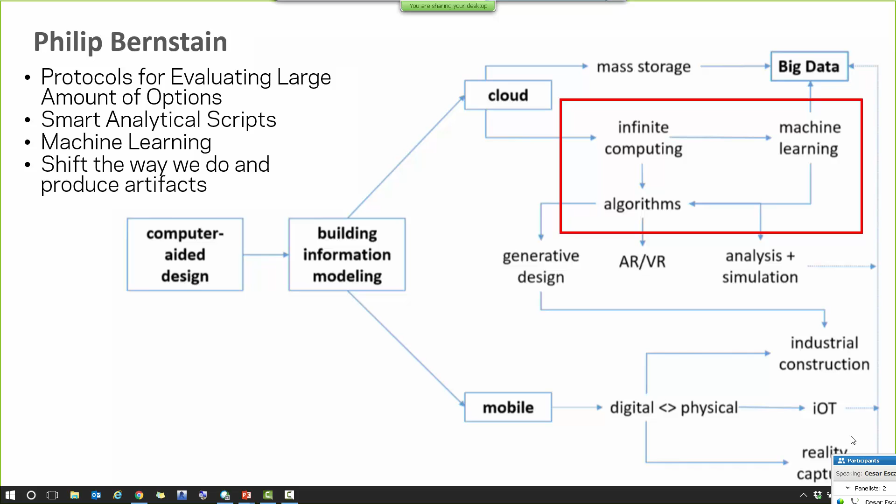The idea was customizing and creating points and diagrams, and her journey from being a practitioner architect into somebody trying to solve design problems by generating new tools. She demonstrated how the Grasshopper tool works and how it's being used in practice.

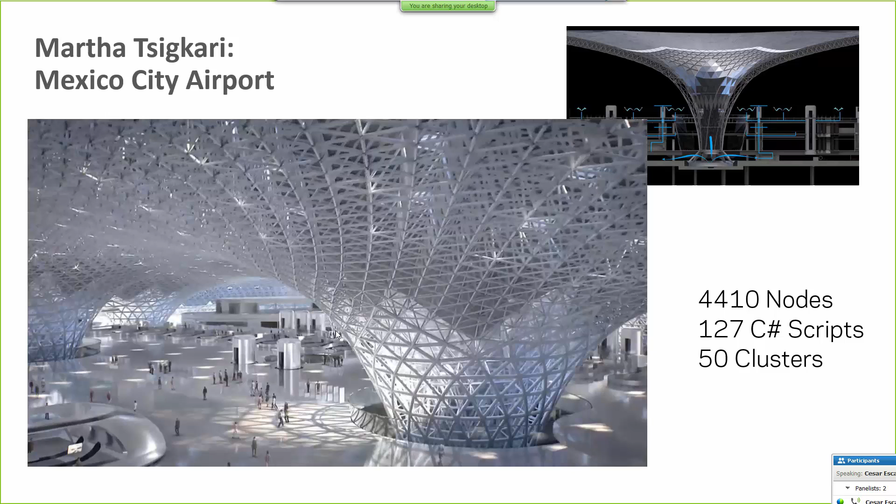Because of limitations of the software, the structure couldn't be created in a single model. It had to be broken down into 50 different zones, and each zone needed to be transformed for documentation purposes into Revit. They used an integration of Grasshopper, Rhino, Dynamo, and Revit for the documentation.

She explained the process of optimizing the facade via an analysis of dynamic relaxation and the different iterations needed to create that structure. In the upper right, you see how they translated the geometry into the Revit file for documentation purposes. So it was pretty compelling, pretty amazing.

The bottom line was that the tools available for designers are at our fingertips, but the level of sophistication needed to get something done required a high level of programming skills. This was one of the comments she had: engaging in an exercise like this required a dedicated group of full programmers, and that level of skill is still far from a typical designer or architect user.

So she was advocating for tools that facilitate that type of computational work and ease the need of creating custom rules and custom nodes.

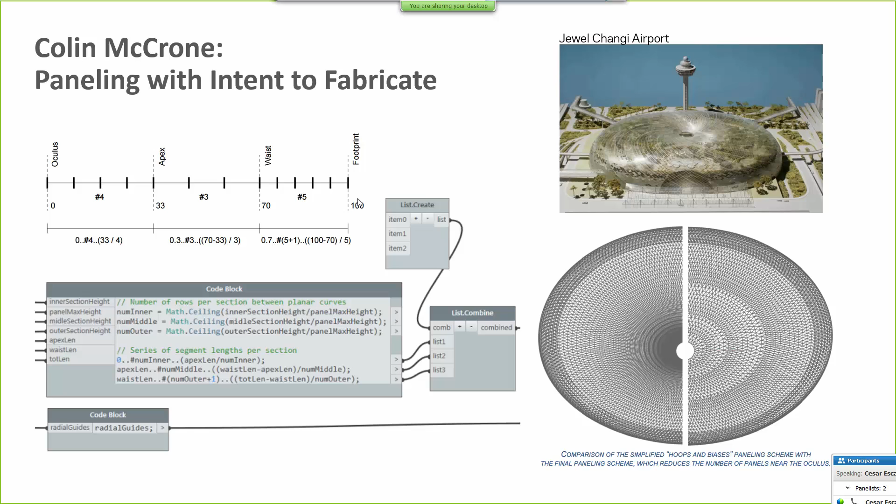The recording is available on the AU website, and most importantly, his workflow is really well documented in a PDF. Feel free to go and check it out and download it, because I think it's a great resource.

I also attended Vegas, because Vegas is not Vegas without partying. Dynamo has an after-hours party, which started at 9:30 and ran all the way to 1. Everybody into design technology was there, probably about 100 people.

And they were showing this. This is the Dynamo Reel, a compilation of all the work that Dynamo user groups have done around the country and the world.

I'm not going to run it all because of time.

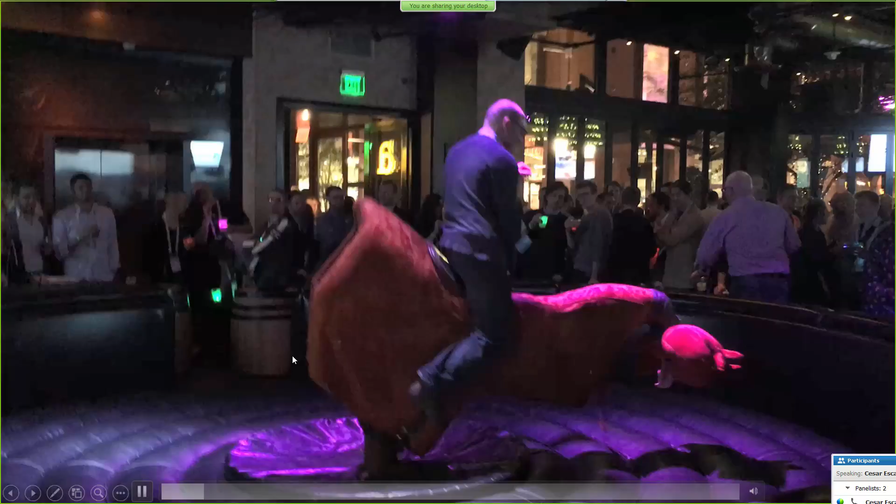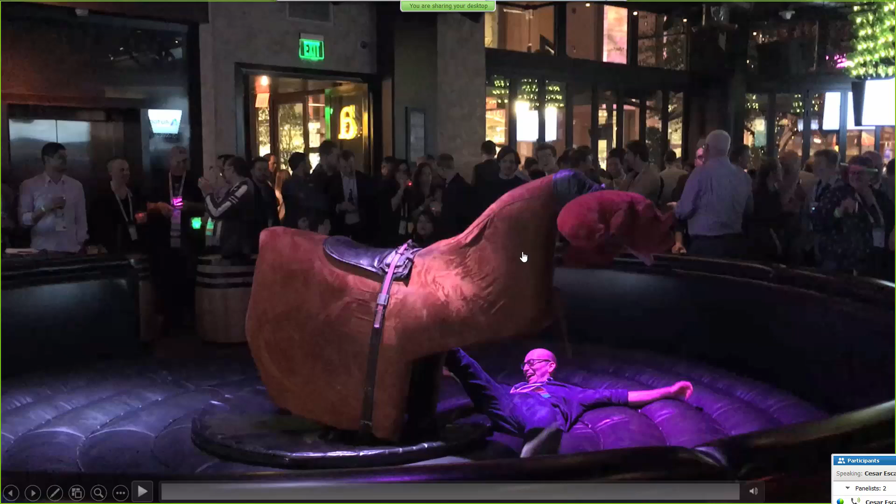And we had time also to have fun. This is Dago at the Dynamo after party. He held it pretty well. It was fun to see this in the middle of that party.

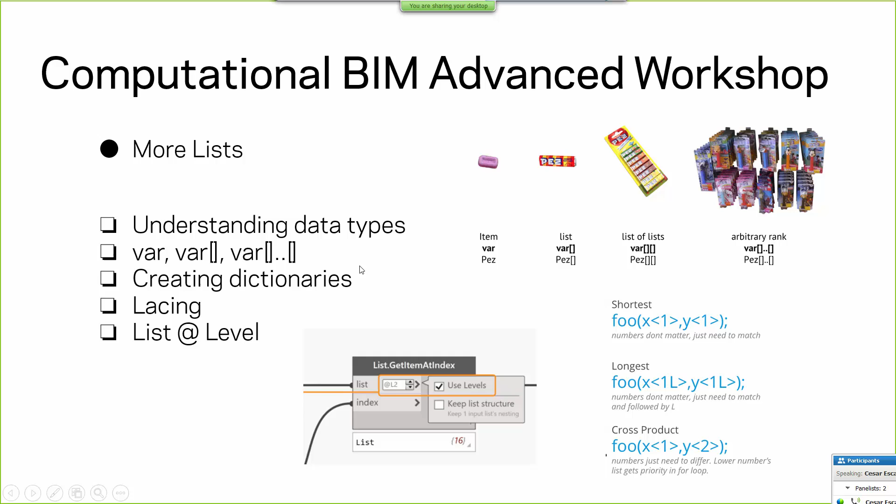This is meant to replace the List.Map node. If you're interested in learning more about this, Zach Kron presented on this topic last month at the Dynamo user group for San Francisco. You can find the video and notes on the SFDUG website.

In this workshop, we were able to do this procedure using Dynamo. There was also another example where we brought in geometry created in Rhino using Dynamo to bring it into Revit.

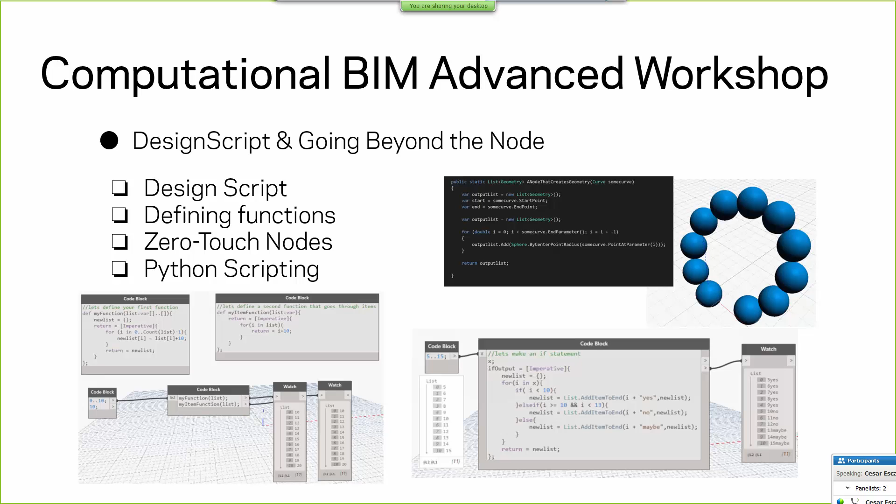The next topic was going beyond the node. What happens when you need a node but it does not exist, or when it's just easier to write code to process your information. There was discussion on design scripts, defining functions, creating zero-touch nodes, and Python scripting, where the presenter gave recommendations, do's and don'ts for each one.

The last topic was T-splines and meshes. Meshing is very useful to us engineers, as we all run into having to mesh something at some point, but it's also very useful for architects. T-splines were not covered in much depth, though there is information in the class handouts. I believe T-splines are new to Dynamo 1.2, is that right?

If you are interested in any of these topics, you can find the class notes and the example graphs, Dynamo graphs, and Revit files by logging into the package manager in Dynamo and searching this topic.

The next class that I attended was coding new nodes with Dynamo. As I said, sometimes you require a node that does not exist, and other times you're running a graph in Dynamo and it's taking a long time, so by using coding options you can write the same script but have it run faster.

In this presentation, we ran through creating about 6 different nodes using C#, and then exporting the code into Dynamo, so that we could bring new functionality into our graphs.

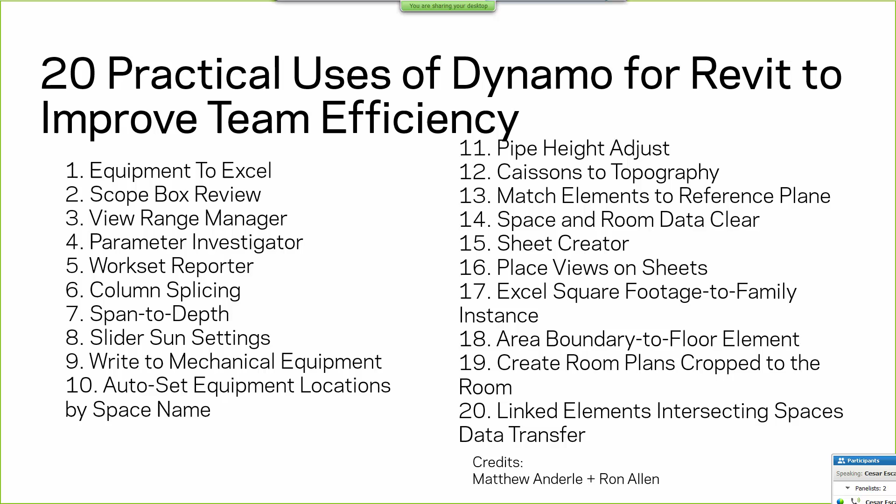Here's one example of how they wrote a graph that lets you fill in an Excel spreadsheet with your sheet name, sheet numbers, and the family you are using for your title block, and then just by hitting a button it creates a list of sheets in your Revit project.

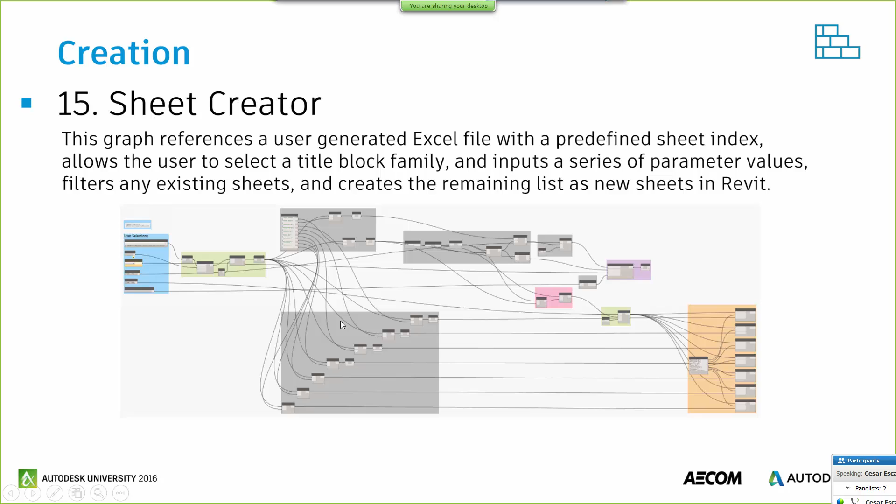One thing I appreciate about this is that it's nicely coded, everything flows, and that was one of the topics they talked about: Dynamo graph organization. This is important when we write our graphs expecting somebody else to use it in the office. We need to make this easy for the next user to access the information and use it efficiently.

We can achieve this by using grouping options and by creating intelligent labels so the next user knows what they are doing. Also, you want your graphs to flow, with a logical path going from the beginning, from the user inputs, to the final results.

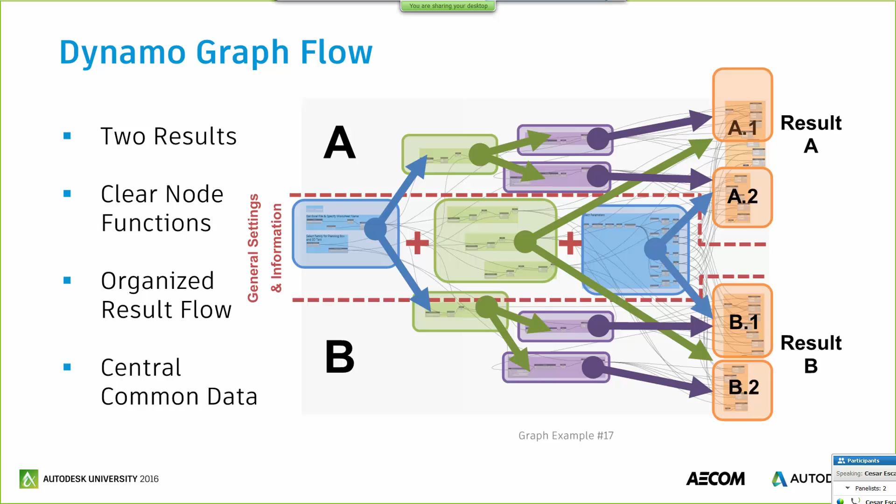Next I want to talk about a new program by Autodesk that I have been playing around with, Project Play. This was also showcased at AU University. It is a program for web development, but it can also be used for creating VR experiences, and it's very similar to Dynamo in that it works off node and string programming.

Let's see if I can get this to work. I'll show you a quick example of an experience. They have a website with different projects that have been created, and one that I find very interesting to our field is, let's say, this one, if it loads.

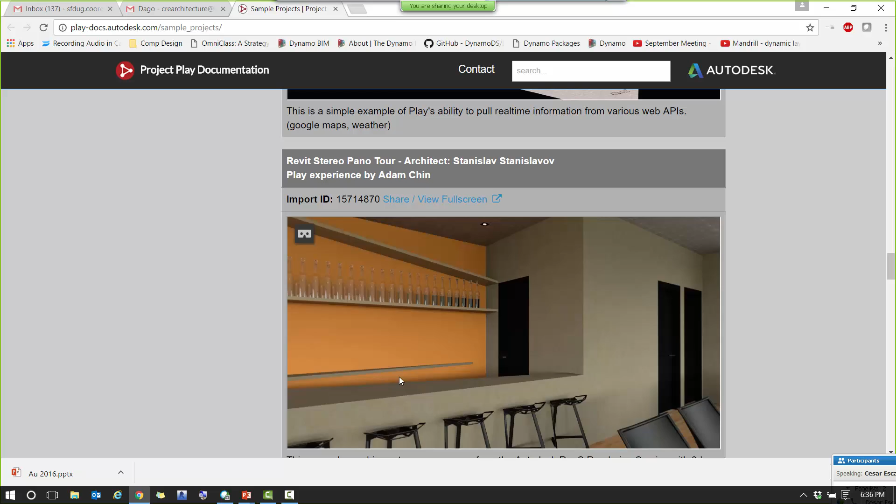Okay, so we are in this environment where we can rotate around. Let's say we want to find out information or move to a new location, we can go up the stairs, move back here, and visualize different options. Let's say we want to change the color of this wall, we can play around with different options, and this can be created into a VR experience.

All these environments are created in Revit and then exported and brought together with this program. It's in beta testing right now so it's not available yet, but very soon it will be coming out into the market. It's something I find will be useful to us.

How did I go back to... Okay. And that is my presentation.

All right, Marcello, are you with us? Yes, I'm here. Okay, so let me introduce now Marcello. He's... thanks for your patience, Marcello.

He is here presenting the topic Dynamo for Structure. Marcello is director of John Martin and Associates, and he's going to share his latest research on workflows related to practical application of Dynamo for structural uses. So, Marcello, I'm going to drag the controls to you, and click the Share My Desktop button.

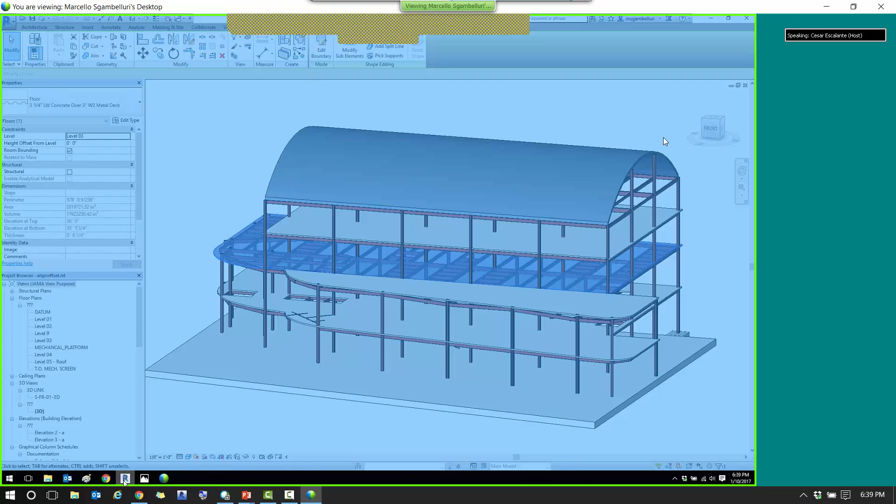Okay, it's perfect. Can you see my screen? Yes. Yes, we do. Can you see the 3D model? Yes. All right, I'll pop right into this thing.

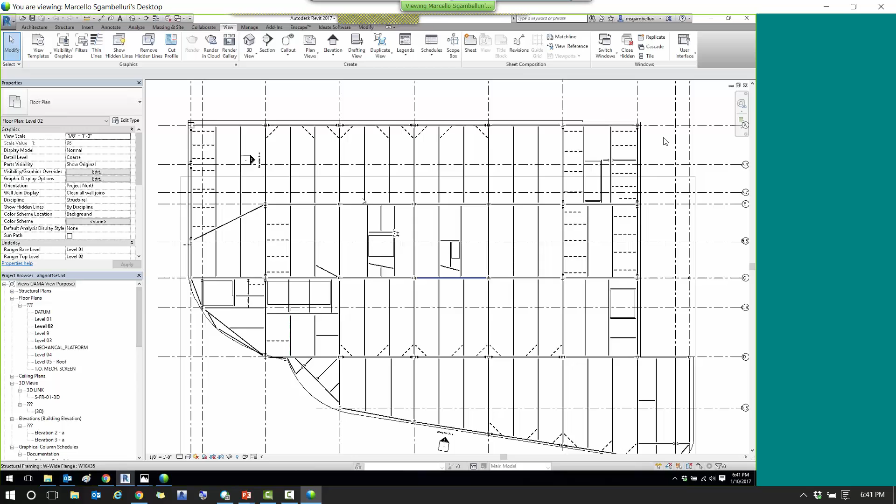I have a typical structural framing. If we look at the floor plan, here are the structural beams, steel beams. They're not labeled, but you can see the structural beams in the floor plan and the slab edges.

One thing I struggled with is that when you want to get beams to the edge of slab, for example if this needs to be 6 inches off the edge of slab, what you would normally do is set it to 6 inches like that. But if you have beams that are off and need to align them, the problem with the align tool is that it basically aligns to an offset of 0.

So if you want this beam 6 inches off this edge, first you click your align tool, grab the edge, grab the beam, and now you're at 0. Then you have to take your beam and move it up 6 inches. Right? And now you're at 6 inches.

Okay, got it. That's fine, but there's no align offset option. If you had an align offset, you could rock through these really fast. So let me show you how to use Dynamo to do that.

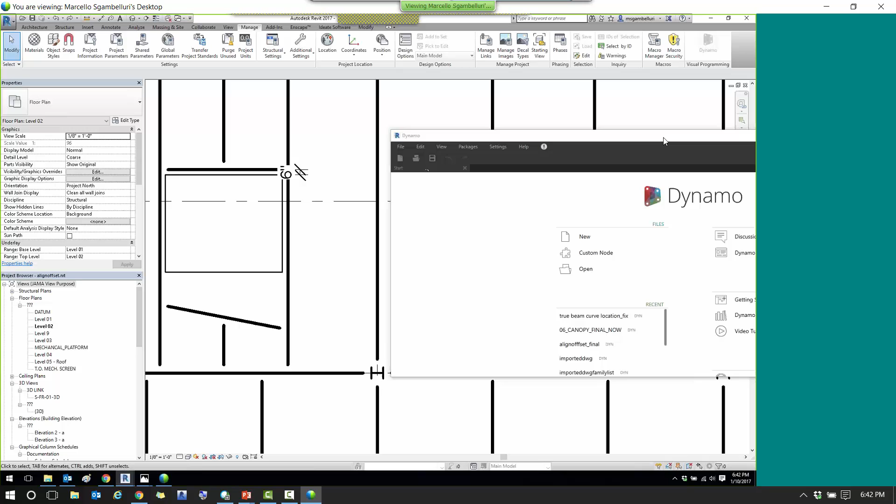So go to Dynamo and open up a new one. Can you see my screen okay? You have a big screen over there? Yes, Cesar? Okay, just let me know if the nodes get too small, because I can't see the screen over there.

All right, first we want to use the new functionality in Revit. It's really cool. I'm using Dynamo 1.2, actually a daily build, but if you're not on 1.2 yet, get on 1.2. There's some cool stuff in there, a lot of new Revit functionality.

Just a side note, if you can't tell what's new, go to the Revit tab, then to Elements, and click on some of these categories. Anything that doesn't have a defined icon yet is actually a new function.

The actual new function we're going to use is called Set Location. This one's really cool because Set Location allows you to feed in an element and any geometry, and it'll set that element to that location. So our plan is to take the beam element and set its location to the edge of this slab, but at an offset of 6 inches. Watch out, it's pretty quick.

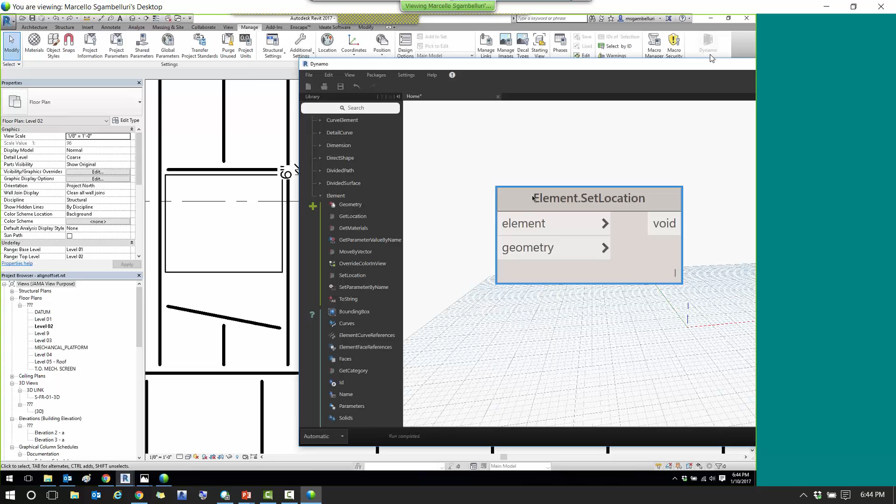So what we do is rotate our view. Can you hear me okay, Cesar? Yeah, it fluctuates, but it's flopping around. Okay, even if you don't hear me well, you're going to be able to see it.

There, we want to select the beam. There's all different selection methods. So for this, I use select edge and select model element. That's the beam. Okay, then the slab edge actually already comes in as a curve.

Let's see if I zoom to fit. You see this curve? That came from the slab edge. That's already a curve. And then we don't want that location because that's at 0.

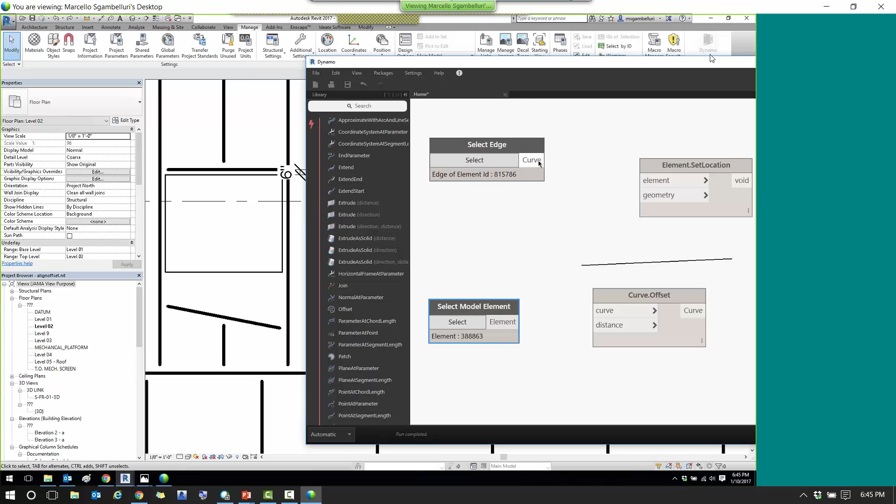So we can actually do an offset. If we go to geometry and then curve, and we cruise over to offset, you see here it gives us a curve and a distance. We can feed in the curve, and the distance, again, is default 1 foot because we're using feet as units in Revit. So I could say 0.5, which is 6 inches, so 0.5 there.

Okay, and then I have the offset of 6 inches from the original location. And all I do is I take the element that I want to move, which is the beam, and then I take the geometry I want to assign it. You see how it automatically aligned it?

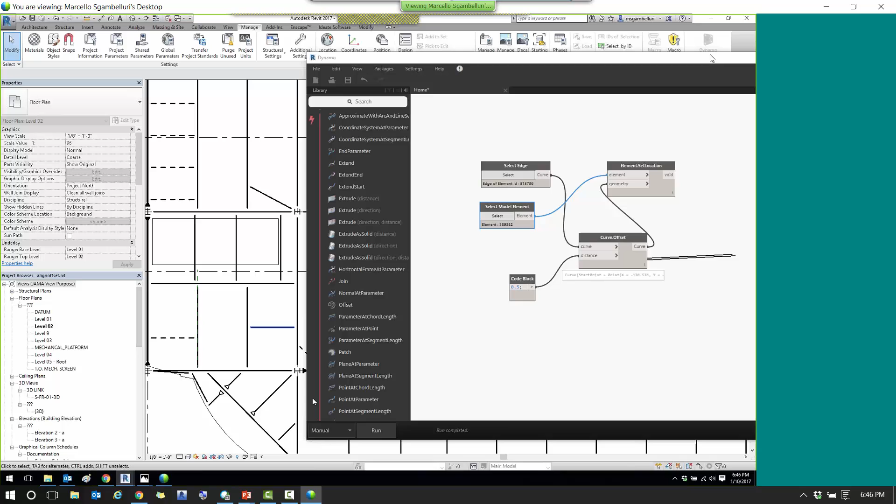Yep, and so what I do is I turn this to manual, and I got my slab edge and I got my beam. And then I just start walking around everywhere I need the 6-inch offset. So here's another one. I'll select my edge, and then I'll select my beam, and then I'll hit run. Boom, see that? It's actually twice as fast as doing the align, offset, align, then move.

So I can do this one too. Your edge, boom, and beam. And then run. What you could also do is you could set this up with Dynamo Player and have it simple.

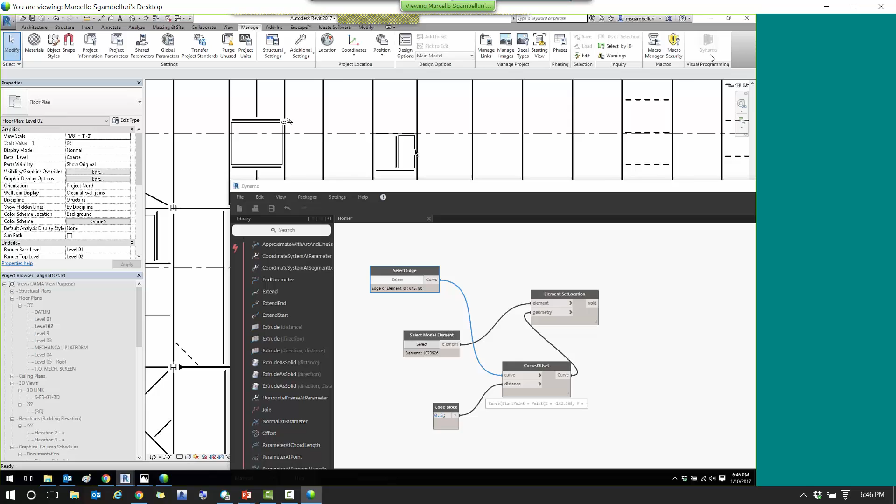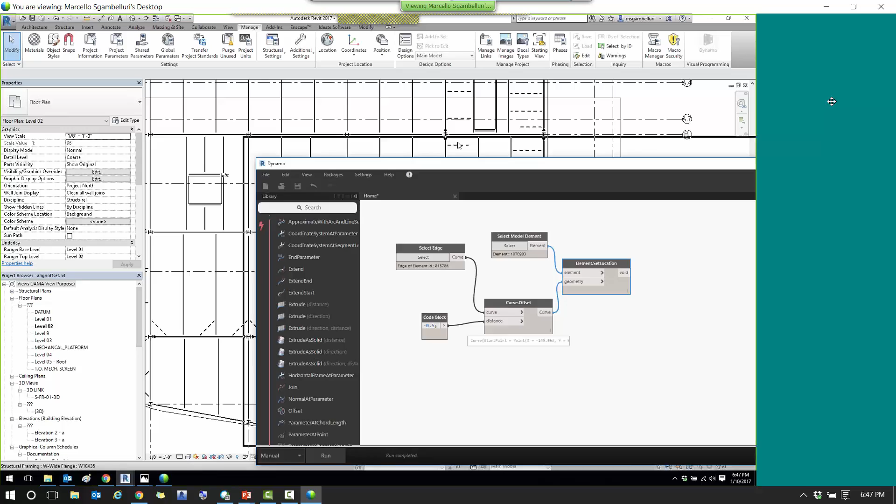This is of course a really simple 4 node, 5 node way to do it. You could really use the application to a much more non-manual advantage where you could do your spatial analysis with a slab edge and all the beams around it and set it to an offset of 6 inches, auto-picking them before you, but I found this to be pretty quick and dirty.

Hey, how's that? Does that help? Yeah. Okay, so you can use this on beams and walls and whatever else you may need where you classically would use an align and move scenario. Pretty simple. All right, let's move on.

Okay, what I got next is... let's see, close that. And what I got next, so that's the align offset. And by the way, I'll have this data set available for you, Cesar, so you could share it with the group there. That's fantastic, thank you.

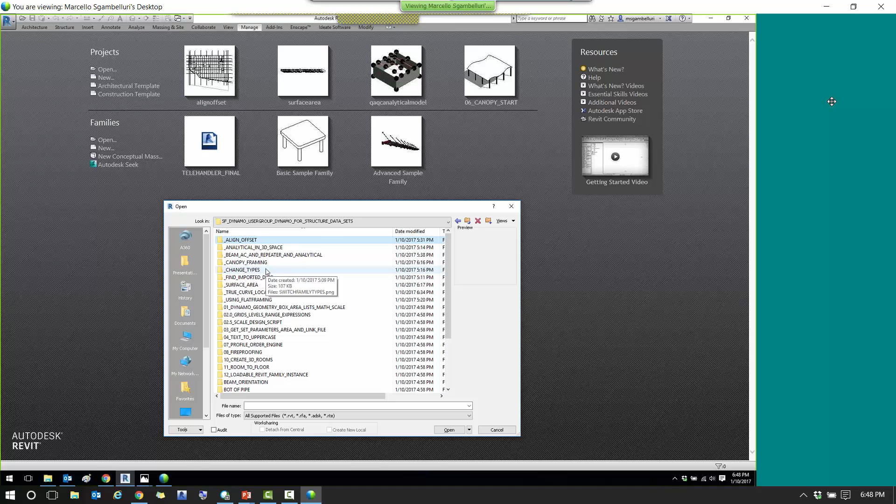Yeah, absolutely. Next, let's talk about beam placement. I love talking about beam placement. Okay, so right, mostly for roof framing, when you lay out structural beams, the frustration I always have is current beam model controls is a piece of garbage. It's about 14 years old, maybe 16 years old now, maybe 17. You could argue it's 17 years old, but it has a lot of limitations.

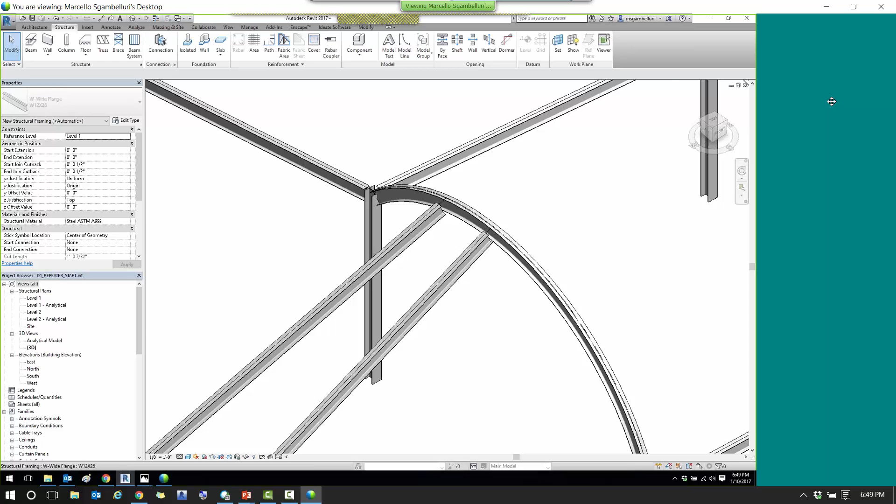In fact, I'm not even sure how to do it, Cesar. I suppose you'd have to take a section cut, put it in elevation, maybe do an array and assume a quarter point. But what I found is the problem with the beam tool is these ends of the beams aren't very smart. They don't really snap. They snap to the beam, but they're not very intelligent.

So you can't snap to the quarter point. You only get the midpoint or the third point. I mean, you don't get the third point. You only get the midpoint and so on. So they're not very intelligent, which really bothers me.

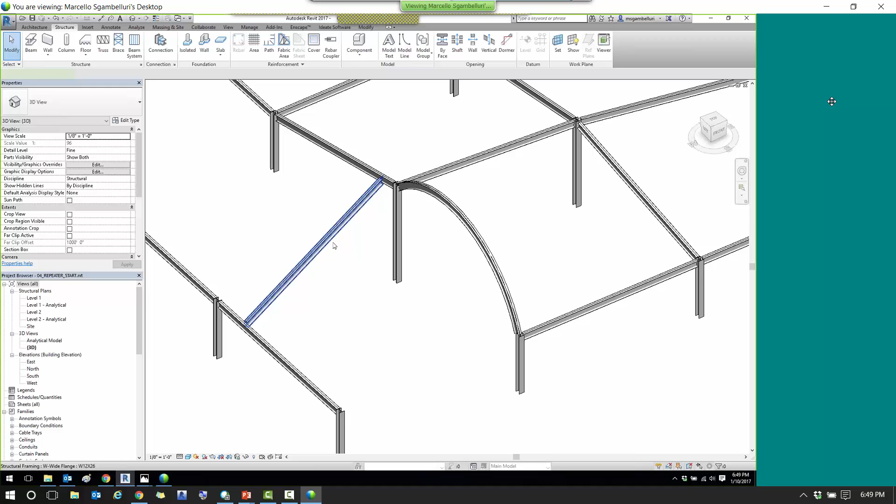But one thing that is intelligent with smart ends is actually an adaptive component, a 2-point adaptive component. So if I make a 2-point, I have one already made. But basically, a 2-point adaptive component just looks like this, it's basically a line with 2 points on them. And they're really easy to make. You just take a model line and put 2 points on the end of it, or take a spline, 2 points, you click the 2 ends, and you say make adaptive. And that's really it. You can then rename it and send it into your project.

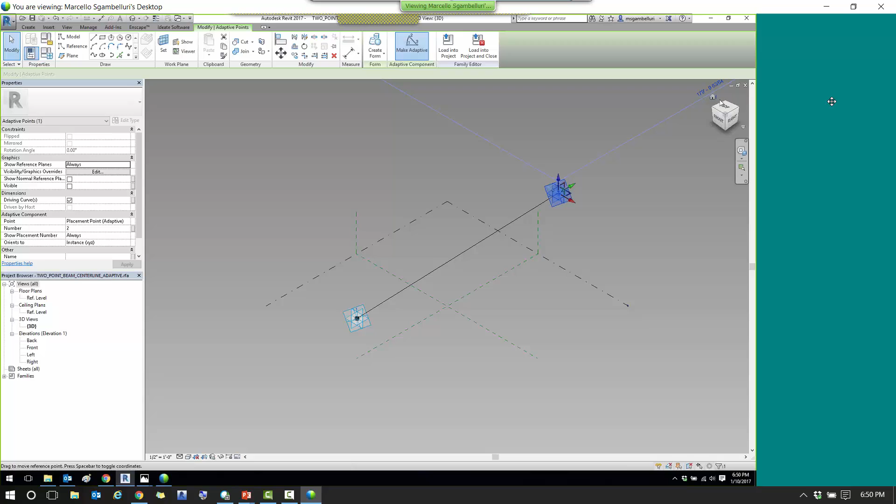And these points can be anywhere, because the whole point of an adaptive point is that it wants to host onto something, so it doesn't matter about its original shape. Okay, so I already made one here. What's really beautiful about the adaptive line is that it's able to host onto structure or really anything. So I can take... which would represent the center line.

Place it here. Let me turn on hidden line too, that would help.

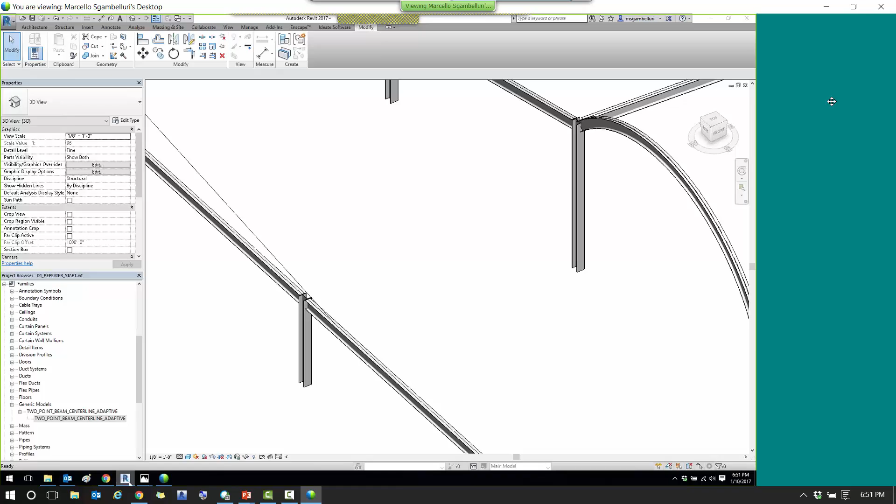Oh, let's hope I don't crash. Oh, I crashed. I might have crashed. I'm having stability issues with my computer right now. Oh, it won't let me, that's interesting. Oh, there we go, that is so weird. It won't allow me to turn, okay, whatever. Not letting me go to hidden view. I don't know, okay, so let's do that again. Well, we just don't do hidden view.

So there, and then up to here. Okay, that's the center line. And you see how you can control that point by location? Point 2, we go point 25 along, quarter point.

Yeah, and then what you could do is take your beam through your snap and then just snap it on, or you could do that. Yeah, and place all your beams, and then come over here and do 3D snap. So first of all, that's a huge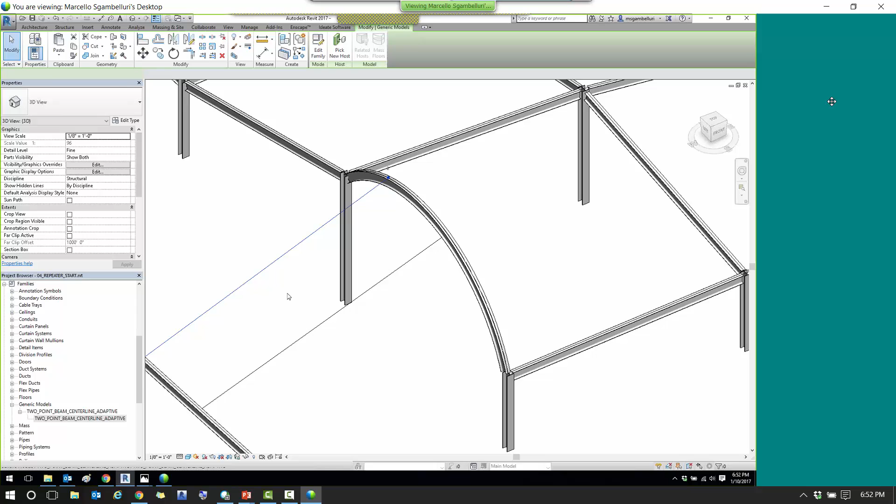time saver when you want to smooth framing. I find it to be extremely powerful. But if you don't want to do the beam,

Yes, all right, so now that we have these in place, you can actually use Dynamo to set them. So you can select the whole first, all of the actual families.

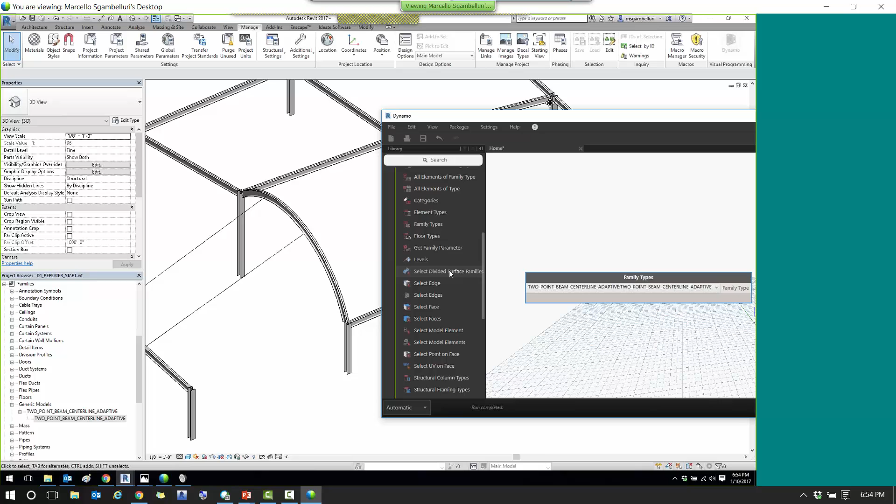So we could do select family type, and then we can find it. I actually named this one 2 point. But what I typically do is name them the actual beam size, so it's W16X26 and so on. And you can select all the types to this.

Okay, so now I have these two selected. And a hint is you don't have to use a watch node anymore. You could just type in a variable and basically have a watch node. So that's how I do my watch nodes, I don't actually use watch nodes anymore.

Hopefully you can hear me. Yeah. Yeah? Mm-hmm. Yeah, it's kind of old school. It's kind of old school to me.

So I just drop in the variable and then type in, and that's my watch node. I suppose you can type in watch if you wanted to, yeah, make yourself feel better, like that. Okay, so anyway, we got two.

All right, so what we want to do is actually place the beam on it. So we go over here to element, and then structural framing, structural framing beam by curve, which is right here, okay.

We want to feed it a curve, level, so what we do is go to the selection again. And the level really doesn't matter because we're framing in 3D, they're not flat, so you can pick any level you want. And then structural framing, you're just picking the type, that could be any type, I suppose.

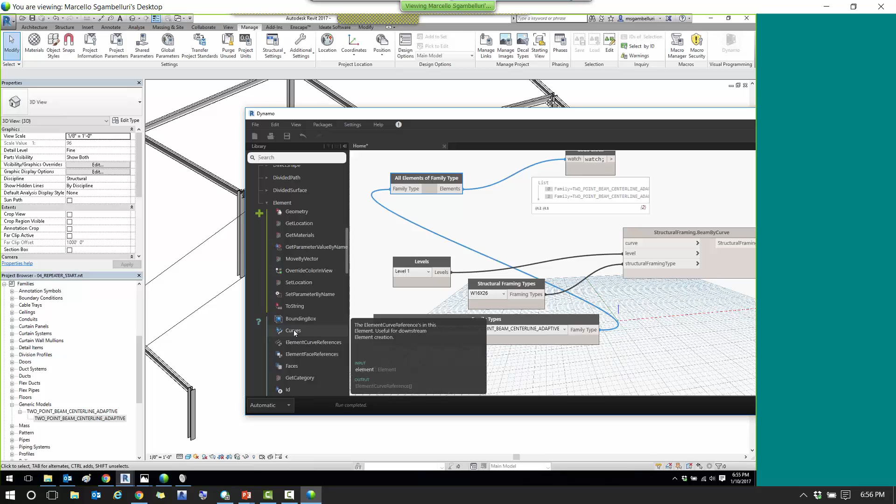and then under that you say curve. This will pull all the curves out of the family. You see that? And then you see we're showing the curve. You take that and plug it into the curve, and you see it sets the beam.

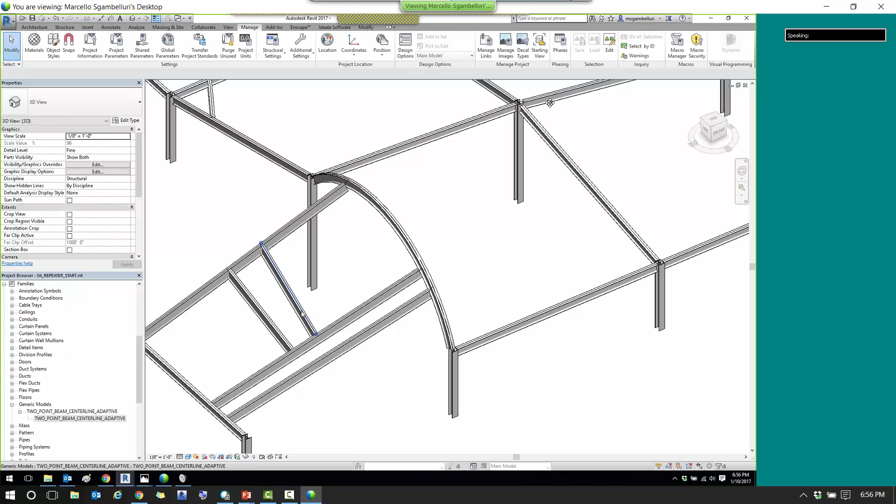And what's really cool too is if you move the adaptive line for any reason, you can minimize Dynamo now, and it will automatically track the location of the move, see? Like that. Yeah, there you go, okay, so that's really helpful.

So quite honestly, I don't lay out structural framing anymore using conventional beam framing. I will lay out adaptive components like this, and I'll make sure all my work lines are correct.

And then after I get that all set up, I'll take that on, and then I'll place on the beam.

Good, can you still hear me? Yes. Quick question - any ramification of having the adaptive component in a different category?

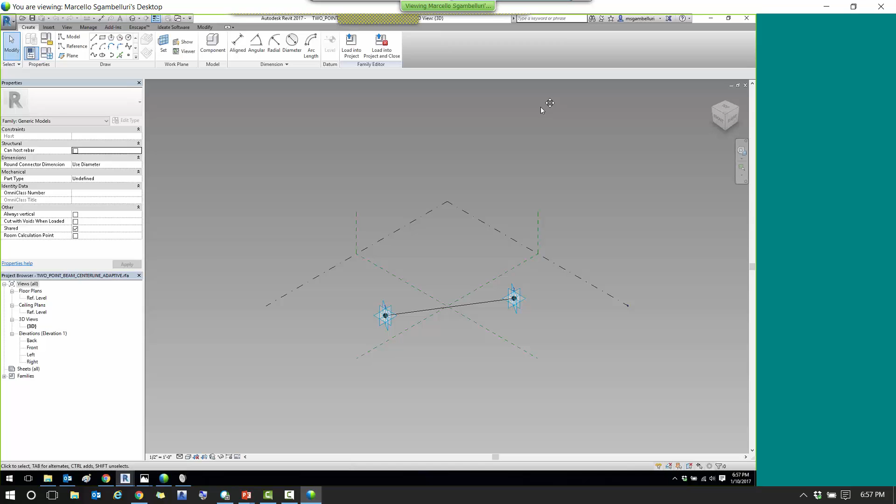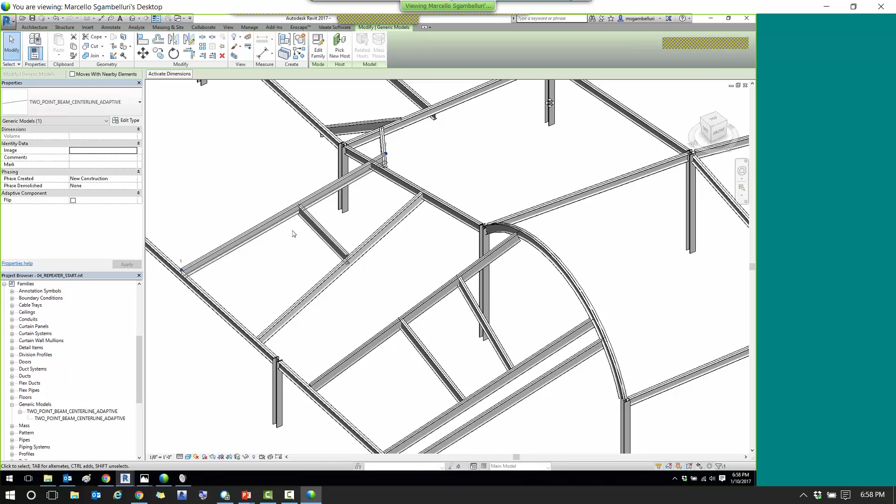What I tend to do is put the adaptive component in a category that we never use, usually planting or something else, and then I'll just hide that entire category in my project. Got it. Or if you're completely done with them, you could even delete them if you wanted to - it's more of a guide to help you. I haven't seen any issue. The time savings here is incredible.

Okay, next I want to talk about more beam placement and being able to use, let's see. Okay, so let's talk about, I got to get back there now. Let's see, canopy frame. Okay.

So some complex framing and curved surfaces - Dynamo is very helpful for this. For example, if you have a surface like this, then you need to place structural beams that follow the surface. So let's talk about first floor.

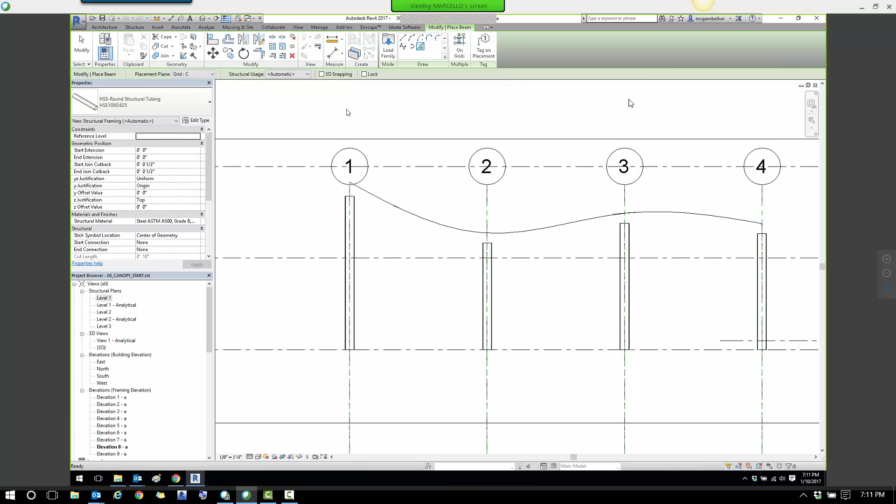If you want to place beams along grid C, this is the surface that you see, but there's no way to actually place a beam on here. Take a structural beam - you're not allowed to use your pick tool, and you can't pick this, even though Revit is cutting through this surface and you can't see it.

So basically what you need is this line in order to place the beam on. But that line is really a result of - here's grid C along these columns - that line is really an intersection of this surface. Let me turn off shading - why is shading on? Or shadows, excuse me. This surface and a plane, which is grid C.

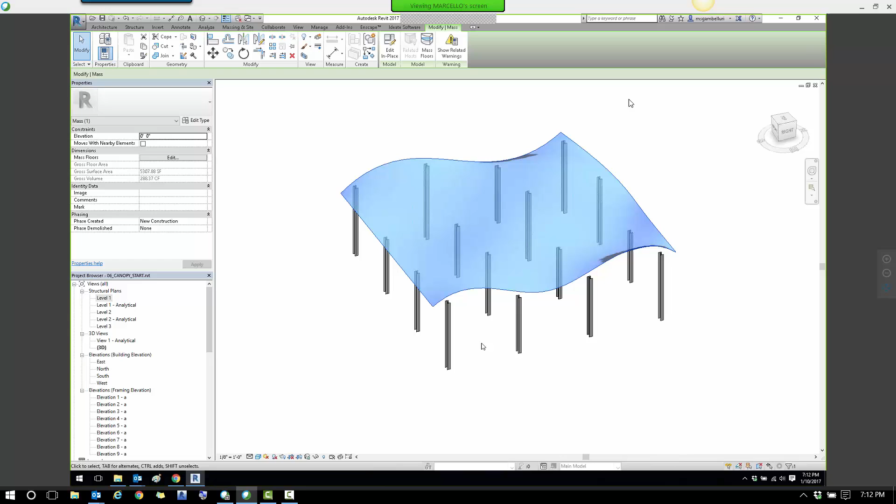So all we need to do is extract those two pieces of geometry and we can do it. So let's go back to this one and use Dynamo again. So we go Revit - keep forgetting - Dynamo's now under Manage in 2017.

All right, so Cesar, you can hear me okay now? Yes. Awesome, okay, so we're going to go new. So what we want to do is select - actually, let's go ahead and put it on every grid line: 1, 2, 3, 4. Isolate.

Now, it doesn't have to be grid lines - it could be arbitrary lines that you place, but grid lines are most convenient, usually for girders, that kind of thing, at least starting for it. So let's go and put those big, beefy girders that would be there. Let's select these 4.

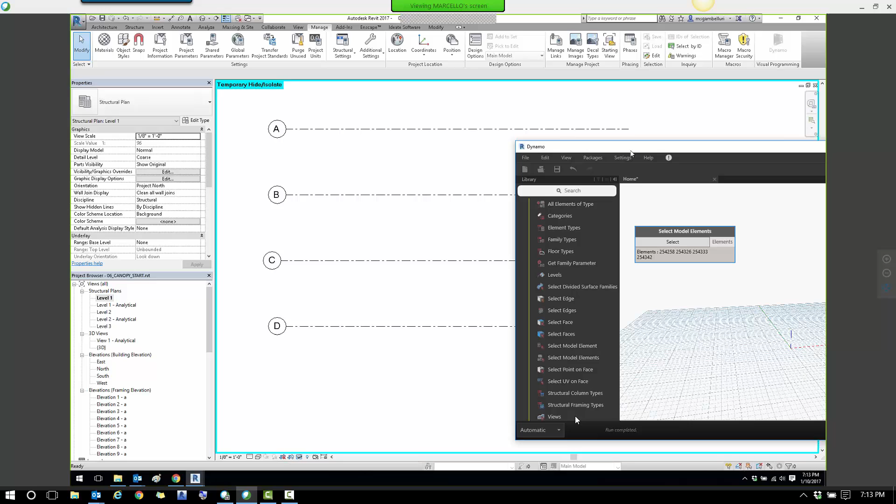So we'll say selection - I'll do model elements. Select model elements this time because there's more than one. Like that - now I have 4. Now grid lines are a little special. We need to actually extract the curve.

So let me put down right now what I typically do when I model anything in Revit from Dynamo: put down that element first so I know what I need to fill with it. For example, if I'm going to do structural framing by curve, I'm going to put this node down first, so I know I need a curve, a level, and structural framing. This curve is going to be the intersection of that surface and my grid plane.

The plane of the grid - so I need to first turn the grids into planes, so I need to first select the curves of these grids, because Dynamo has no idea what these are - excuse me, these are Revit grids that I selected. So Dynamo has no idea what Revit grids are. They've got to be converted into Dynamo geometry.

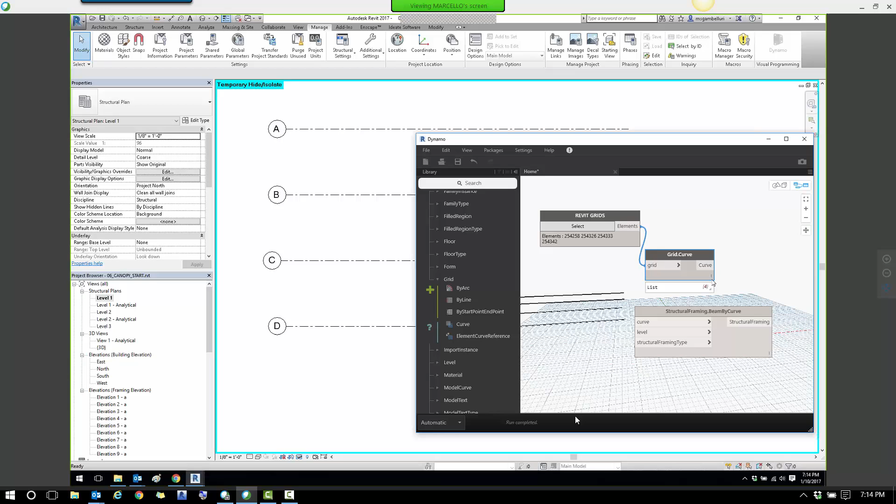But grids are special because they've got extents, bubbles, and text, so they're real complicated. In order to extract this curve line, you wouldn't normally do the typical curve extraction - you would say elements, then go under grid, it's similar to a beam, and then say curve. It says get the underlying curve geometry of this element - it should say 'of grid' because this is all specific to grid, but anyway. So we can go like this, and it will actually extract the line. But if they were curved, then it would be a curve, okay?

So that's cool. The next thing we can do is get that surface that is the roof surface, or the underlying mass that would support a roof surface. Because you could have a roof and pick the face. Okay, I'm jumping ahead. Let's select that.

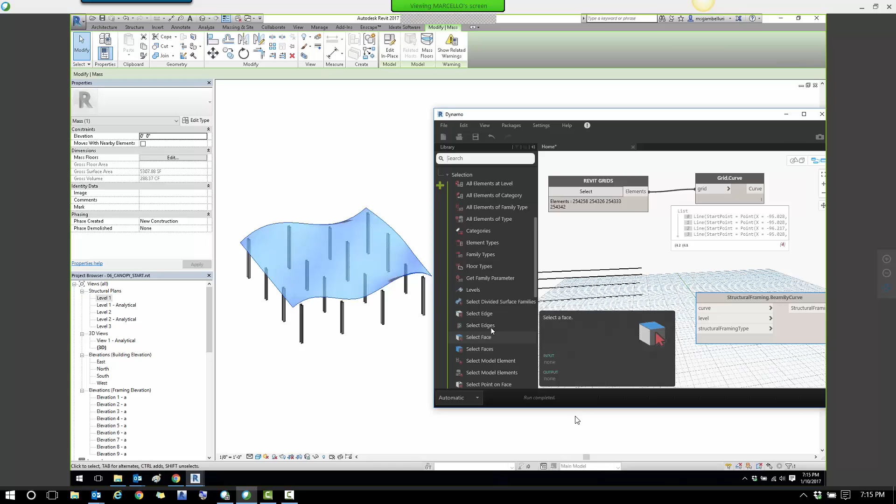So we go Revit, selection, and then select face. I'm using select face. There's only one face here, but sometimes you'll have a curved roof, a solid element, and you need to select the underside of it, and select face works for that. It will automatically extract a surface, so now we have the roof surface, the underside, and now we have the curves.

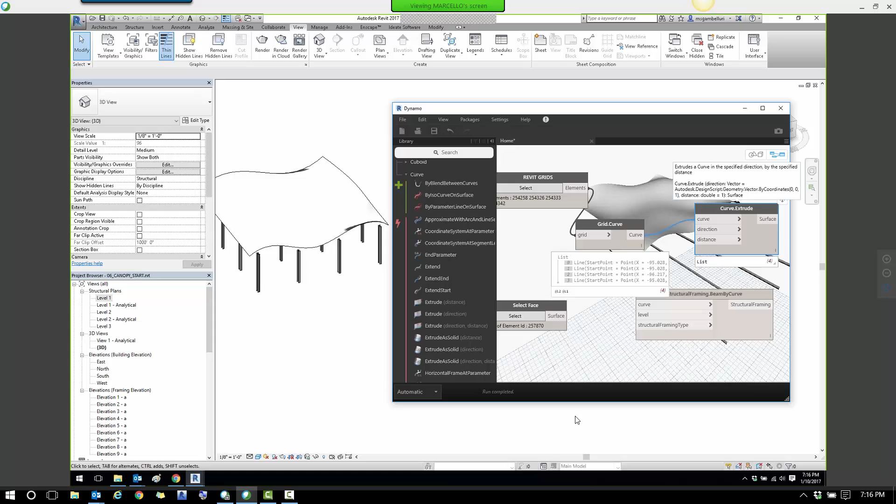All we need to do is extrude these curves up so they become planes. So I take the curve, now that I'm working with Revit Dynamo geometry, I go to curve, and under curve I say extrude. Extrude curve, direction, which is vector up by default, and distance, which is 1 foot. I'll feed the curve in, you can see them extruding, but this distance probably needs to be like 15 or 20 feet. It doesn't really matter, as long as it's past the surface.

So now all we need to do is run an intersection between those planes and that surface, and we've got our curves to feed in, to place our beams on.

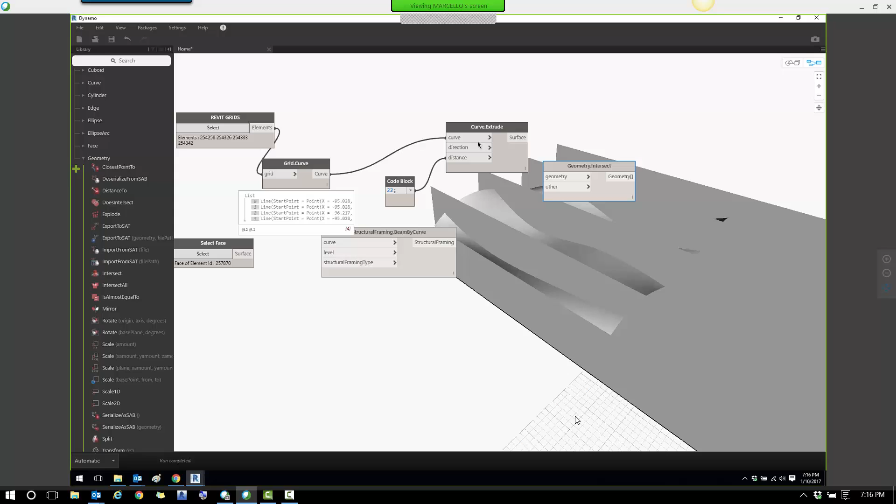So all we do is run an intersect. We go geometry, geometry again, and then one of my favorite nodes in Dynamo is this geometry intersect. The reason I like this so much is because Revit doesn't have a geometry intersect function. If it did, we wouldn't be going through all of this. You don't have an equivalent function in Revit. Well, I suppose you could argue that placing grids on surfaces, if you divide them, you could do that with reference planes, but not with just any element.

Okay, so now we have the surface, we have the face, which will be our geometry, and then our surfaces, and we'll do that intersect. And why didn't it work? Oh, okay, because we have to apply it to the entire list. So we're going to turn our lacing to, in this case, could be longest or cross, either one actually, because we're only feeding in one here.

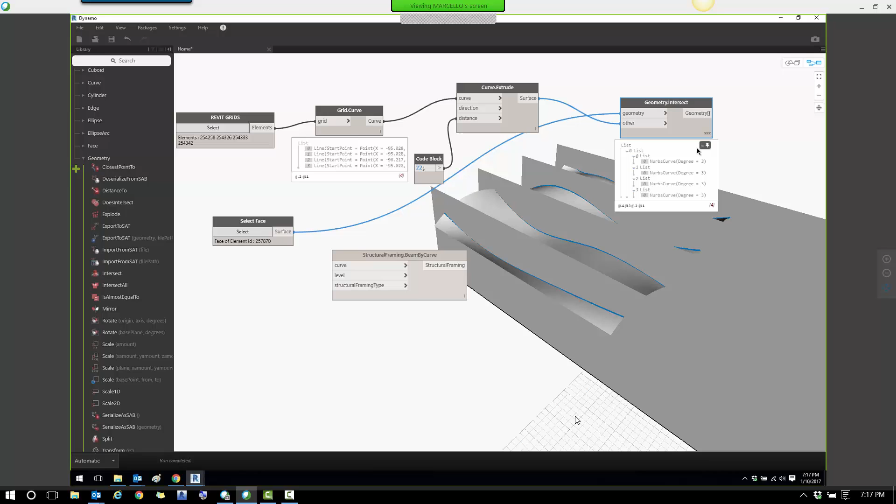And now we've got all of our curves. So if I turn that off, you can see them on there, right? That's golden. That's beautiful. Oh, that's pretty to me, quite honestly. All right, so now we've got a curve. Let's just rock and roll again.

We got Revit. Now we have to put in levels. We got, let's see, where's levels? Levels, and we got structural framing types now. Because this framing is not horizontal, it doesn't really matter what level you pick.

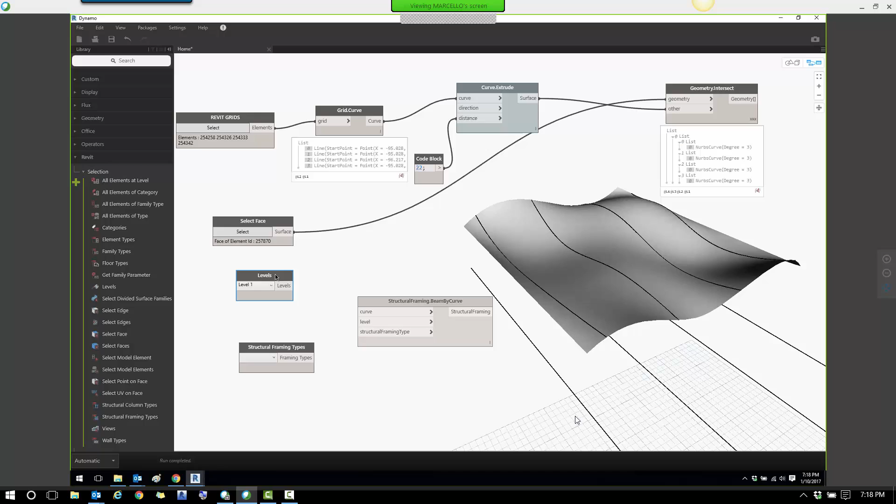I quite honestly like to put my roof framing on level 1, because if I do that, I can read the output on each end, and I know it's relative to level 1, and I'm actually reading a top of steel value. So instead of reading off whatever level the roof would be, maybe plus 2 feet, I'm reading it off level 1, and I know it's 57 feet, 2 inches or something. It's a good way to back check the top of steel I have to eventually document. It's kind of something that I do. It's really helpful with roof framing.

Okay, so we fed that in, and then all we need to do is feed this one in, right? The curves, you can see these curves, into framing. And now it should do its magic.

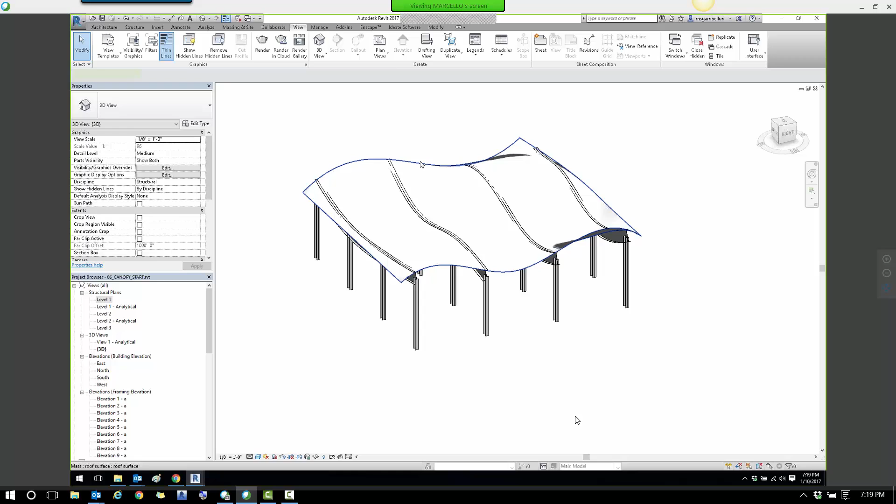And now, if there's any changes, it can be tracked with Dynamo. For example, Dynamo is now tracking the grid location, so if you actually, let's see, how do we do this?

Cesar, you're probably better at this than I am. Let's see, tile. Yeah, probably tile. Let me close this one. Tile again, maybe. Let's see. Tile. Yeah, here we go.

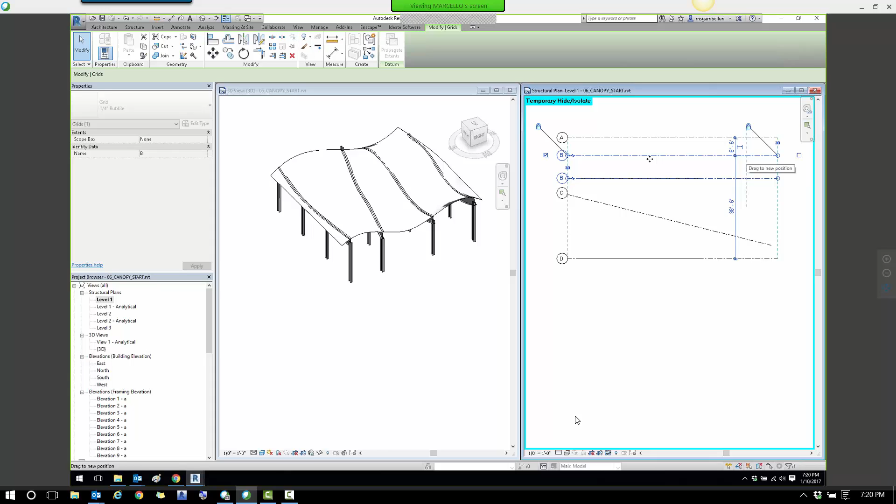Okay, so if we were to take this grid and move it in any way, see, this is grid C, then it should automatically update the beam, see? Or if grid B moved somewhere, then it'll automatically change the framing. See? Cool, huh? Of course, the columns go with it because they're tied with the grid.

All right, any questions about that? Basically, all you're doing is grabbing the surface, grabbing the grids, extruding them, running the intersect, and then on the intersect, that's what you're feeding into the structural framing. And then at this point, what you could do is then take over from the last example.

I'm having trouble with these. These are kind of buggy down here. I don't know why.

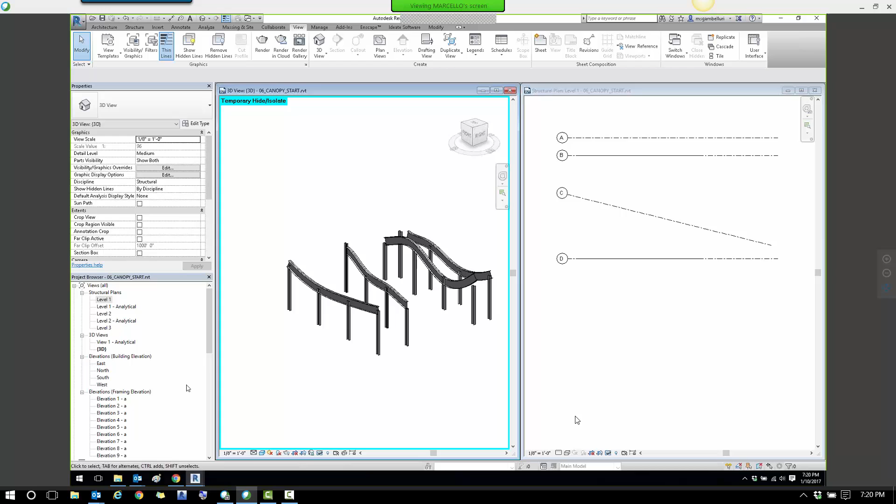You could then do adaptive components and put straight members between here, right? If you wanted to. Typically, then I guess they could be curved, but if you had straight members running between here, you use this method to place the curve, and then to do the straight beams, you can do your adaptive component, and then boop, boop, boop, and away you go.

Yeah, that canopy framing could be framed out in the architecture office. Actually, you could frame it all up before you send it to your structural group.

Cool, I have a question. Will it work with curved grids? Does it work with curved grids?

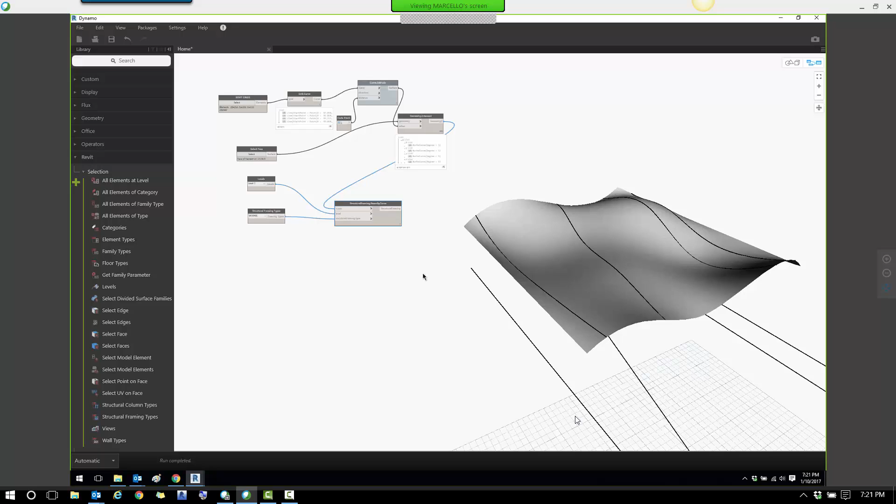Well, yes and no. It would work with curved grids in terms of getting the intersection. So you could get the curved grid. You could use grid curve, and it would extract a curve. Here it would say arc, yes, instead of line. And then you could do the extrusion and do the intersect.

And you would see on here the blue line that would follow. But now that blue line's curving in two directions. It's curving in plan. Yeah. It would be, I was just kind of logically thinking about this, yeah? It'd be curving in plan, but then it would also be curving in elevation. So in that case, you'd have a compound curve.

So if you were then to try to use this node, it would fail because you can't place structural beams that curve in two directions. But that's a limitation, of course, of Revit, but you could use that intersect and place, you could do an extrusion and model a beam, you could do not an in-place, you could make it another way.

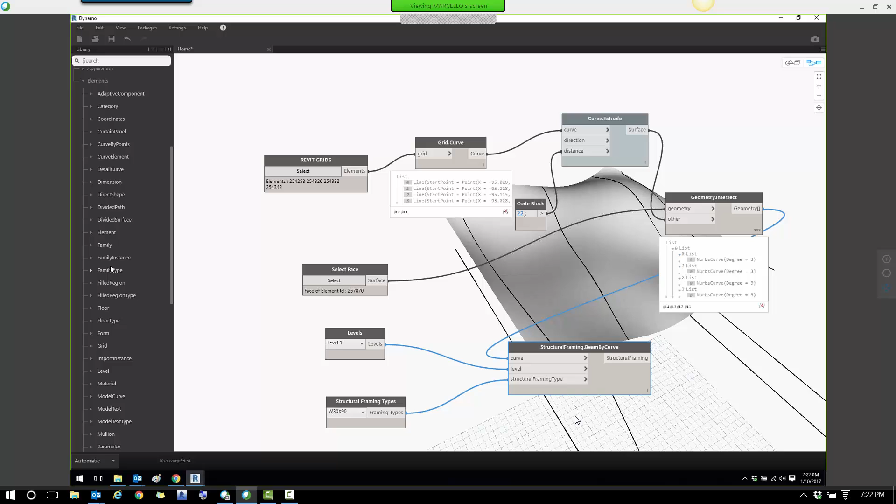You can make it, what you could do, Cesar, is you could make it using Dynamo geometry, and then you could now use these new and improved nodes called... what am I thinking of? The new ones that bring the geometry back in. Why can't I think of that name at the moment? Oh my goodness, direct shape? Yeah, direct shape. Yes, direct shape.

And then you can use this to bring the geometry back in the structural framing category. Got it. But typically for structural framing, you wouldn't typically see beams that curve in two directions unless they're on edges and they're tubes, symmetrical shapes. These I-beams hate it when you twist.

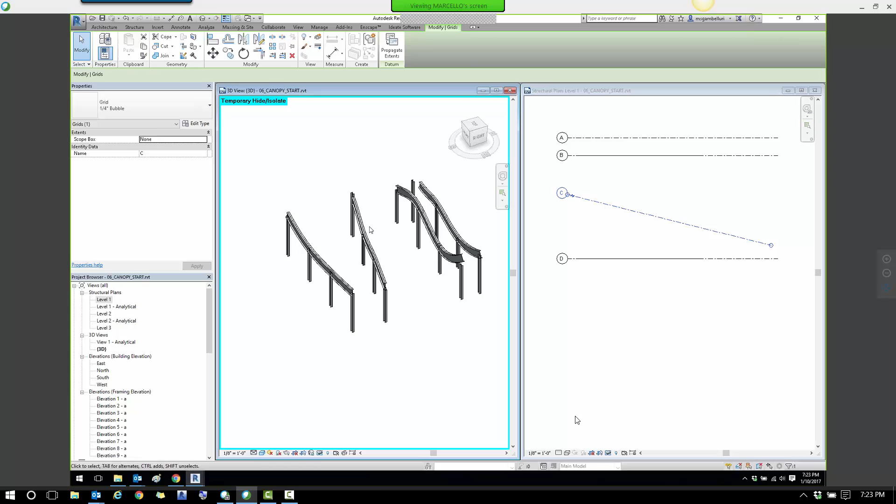The other gentleman there, I'm sorry, what's your name? The one who did the code speaking? Dago. Is he still there? Dago? Yeah.

The secondary stresses and bending a wide flange in two directions, the amount of torsion resistance on an open section is just extremely small. So if you were going to do something that bended or curved in two directions, you'd need a closed shape typically.

But okay, enough of that. Any other questions? I use this method all the time, quite honestly. And another thing I do, I won't go into it, it was actually a separate example, is you see these are grids, but they don't have to be grids.

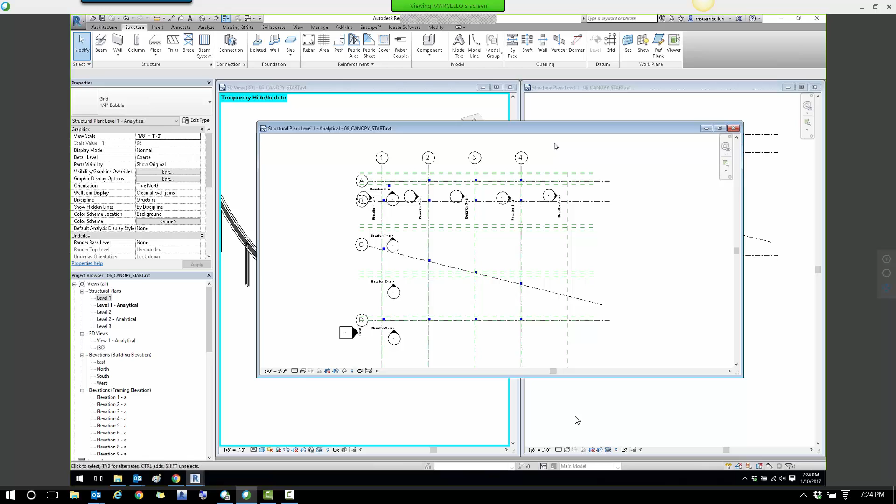Just for example, what I do sometimes is in my floor plan, I will actually take my grids, and if I have a curved roof, for example, I may actually lay out all my framing with model lines in plan, like this. I'm just running through this quickly, but just as an example, maybe the structural framing in plan looks like this, right? Just as an example, but it's truly flat when I model it.

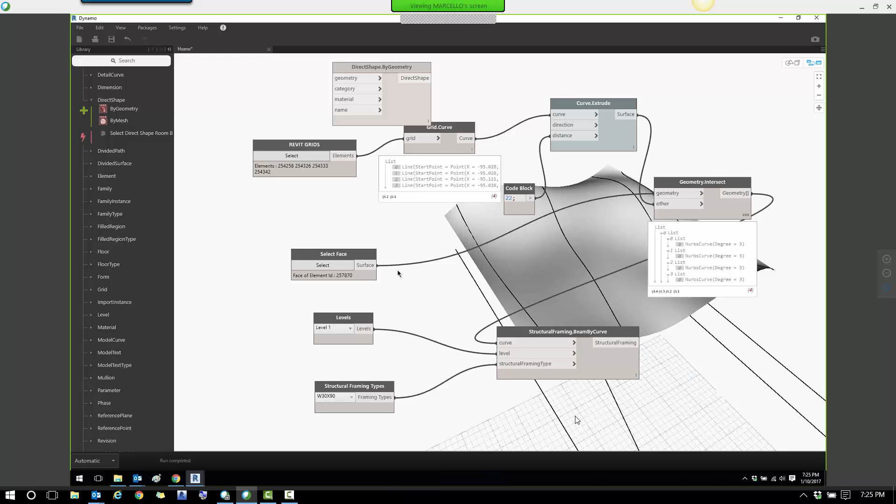So you see that framing down there? It's flat. But I model it all flat because it actually looks the same in plan. But then what I'll do is I'll use this same method, but instead of extruding grids, I'll extrude those model lines, and wherever they intersect, it's basically projecting that framing onto the curved surface. Was I clear enough on that?

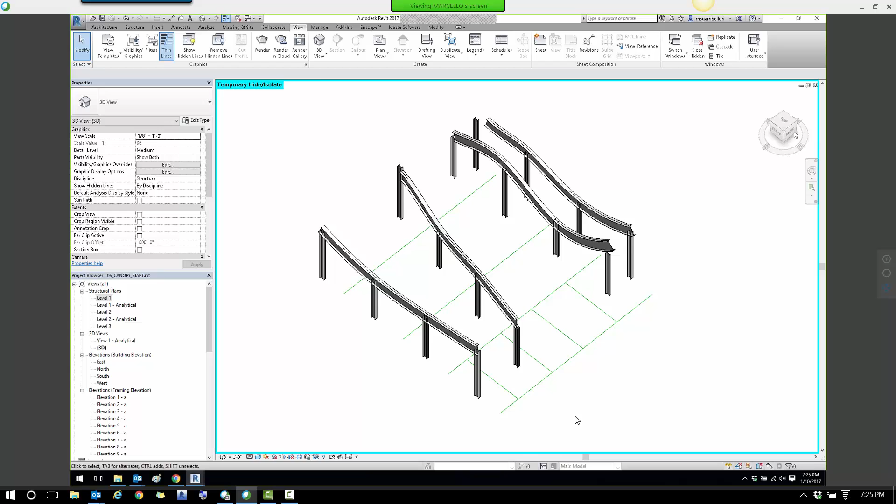Yeah, that makes sense. So I can go from flat framing to curved framing by just modeling it flat. And I'll typically do that in schematic because in plan it looks the same. Once I'm done with that, I'll take all these, extrude them up, get rid of the model lines, and then I'll have all the framing curved on the curved surface.

Or I'll keep these in a work set that I'll then hide. And if there's any changes, I can just make them to the model lines downstairs here, and it'll just make the update. Or, this is really not working here. Or if the roof surface changes, if this roof surface were to change, it's still tracking its geometry, then it would then modify the framing accordingly. So just some other options there. Yeah, great, okay, cool. Yeah, I can go on and on.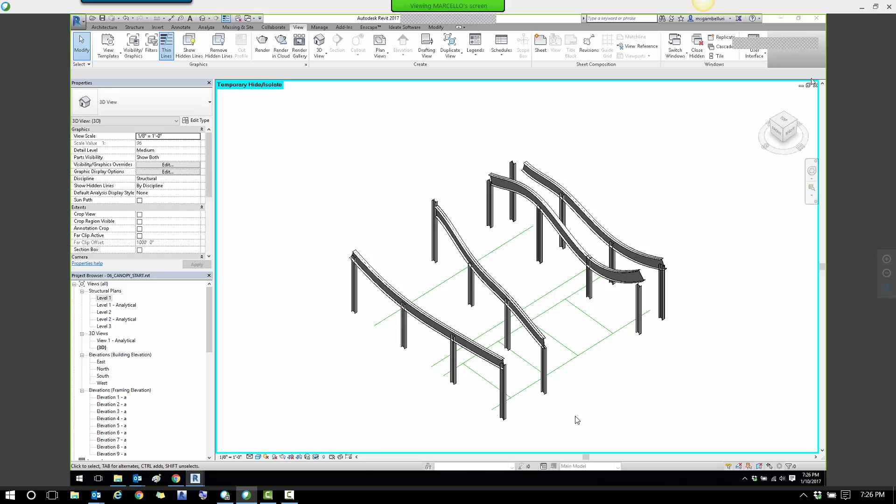Maybe let me do a tiny one real quick, and then we'll call it quits. Okay, so got that, canopy framing.

Let's talk about one more, which is surface area. Just a quick practical one: a contractor asked me, if you have a bunch of beams, is there any way to actually get the surface area off a wide flange so I can do my fireproofing takeoffs? And right now the Revit schedule won't do that.

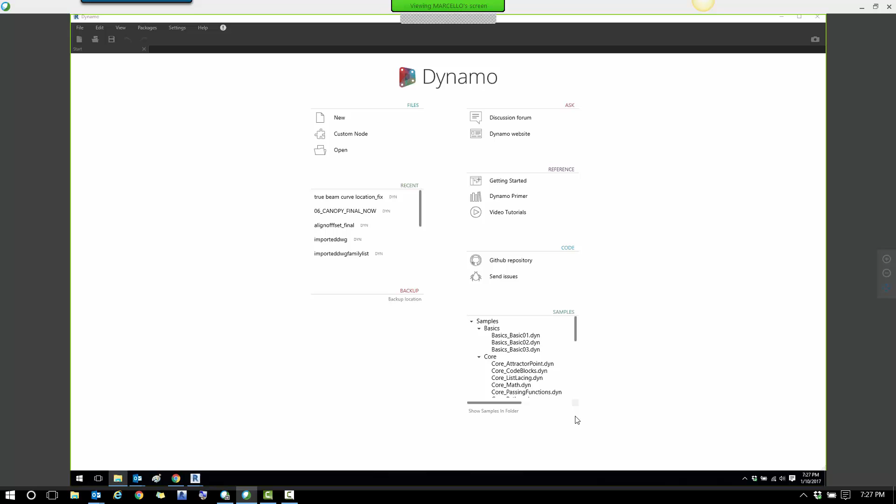So you can use Dynamo. It's really simple. All you have to do is, let me turn that off, I'll start it again. Hey, there we go. Yeah, it's really easy, I'll go over it really quickly. In fact, I don't need to build it for you, I'll just show you open. I won't build it for you, I'll just explain it.

Here's somewhere, let's see, I have it all for you in your data set. Here's surface area. Okay, right, here we go. Okay, so let's see, let's start here. All right, so what we do is, you basically, so here we go.

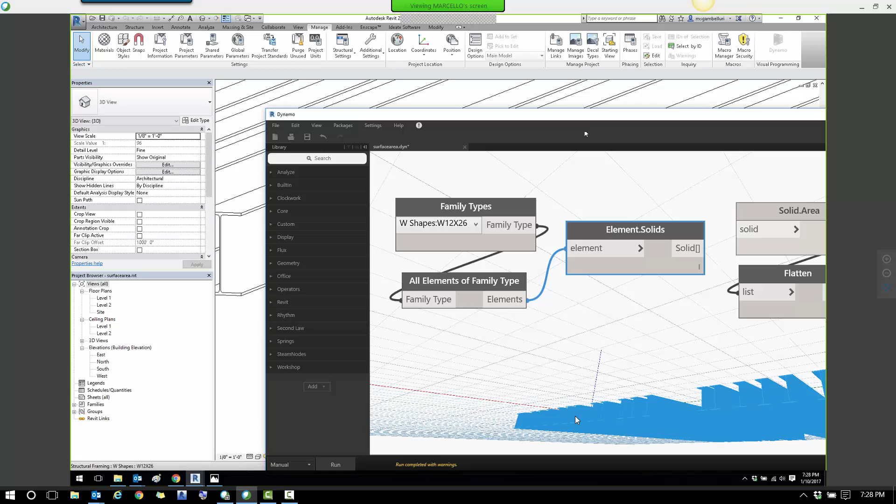You select all the families, and then you change them all to element solids. It'll extract all the solids. See it here in Dynamo? Then there's this beautiful node right here called solid area. It's under geometry, under solid, and then under solid, it's right here. See this area? Returns the surface area as sum of all areas of all faces.

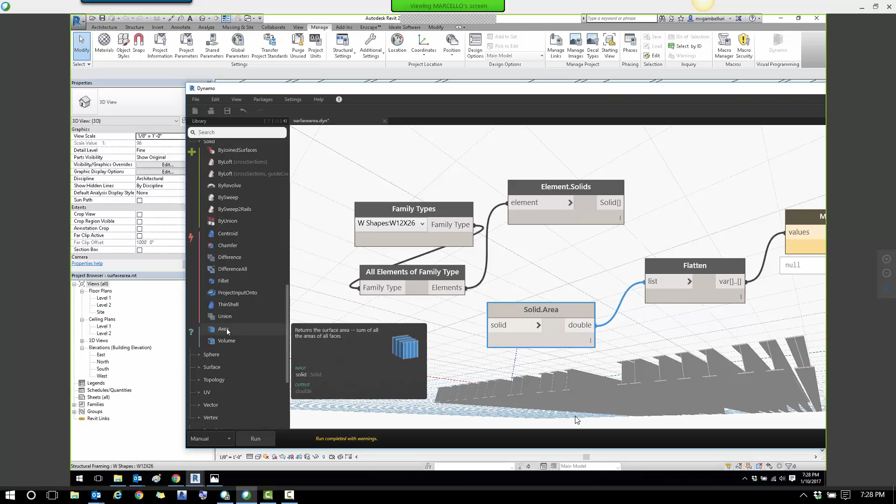That's really powerful. Before I was actually taking all the faces and calculating surface areas, but this will do it for you. So once you have a solid, then you just use this solid area, and then it'll calculate the area of all the faces. Okay?

And by the way, I confirmed this with taking one beam and then using the AISC manual and looking at the surface area. So I confirmed that this method is valid. It's off by about 1%, only because the way the AISC manual and the way Revit models the actual beam are just slightly different, ever so slightly different, but they're close enough.

Okay, and then of course you just use the math sum. This is flattened only because you don't want individual lists. They have to be one list with individual items in order to do the math sum. Okay, so that would actually be total 3,240 or so square feet of surface area of beams.

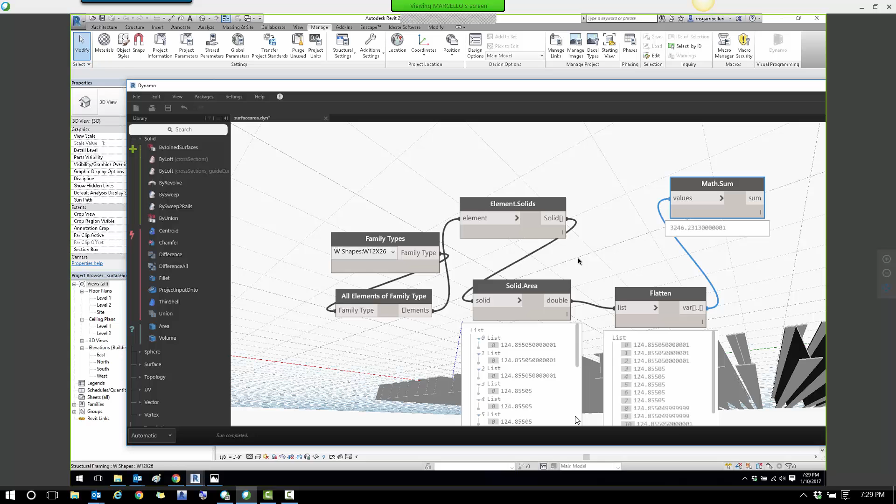Okay, any questions about that? Pretty simple. Yeah, I have a question, showed that to the contractor. Yeah, you wouldn't fireproof the top of that beam. Yeah, you're right. Who asked that? That's an awesome question, who asked that?

Dago, the other presenter. Cool. No, that's an awesome question, very valid. In that case, this would work really good for columns, or if you want a quick estimate on beams, but you're right, rarely would you have a beam where the top surface would be exposed. I suppose there's some rare cases, right, but usually you'd have some kind of deck on top. That's correct, and it wouldn't be fireproofed. That's correct, in that case you wouldn't be able to use this.

In that case, what you could do is go back and do what I was telling you. I won't go through the whole thing, but you could then go to your actual geometry. And if you look here, there's something called faces. You could actually extract all the faces out of each of your families, and then it'll give you a list of a list, and this will be all the surfaces, all the faces of each beam.

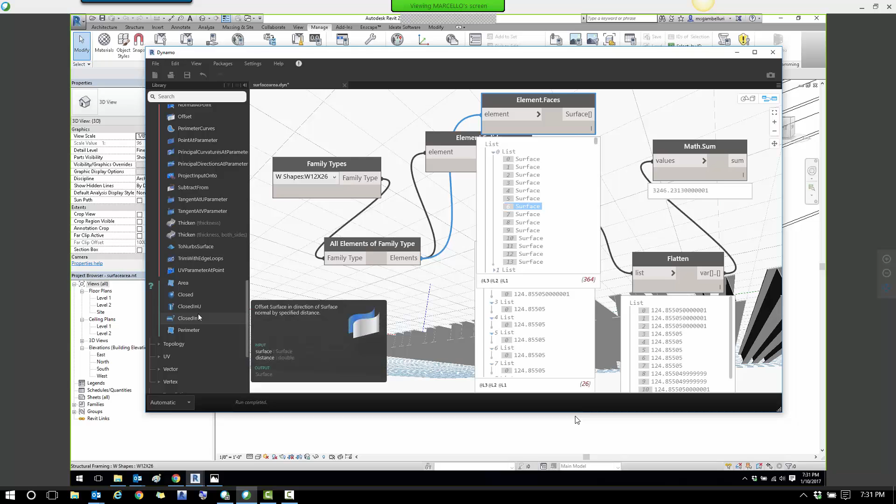Then you would pull out this list and remove the top face. Luckily, faces or surfaces actually have an area as well. If you look under surface, it has an area property that returns total surface area. So you'd pull out the surface, run that, and then run the math sum. Does that answer your question? It does, very good question.

In fact, if I look at this list, I can tell you it's probably either... okay, let's see. No, this would be the web, right? So it'd probably either be 6 or 12, yeah? Yep. Yeah, okay, cool, yeah, good.

I love geeking out about this engineering stuff. Yeah, alright, any other questions about that?

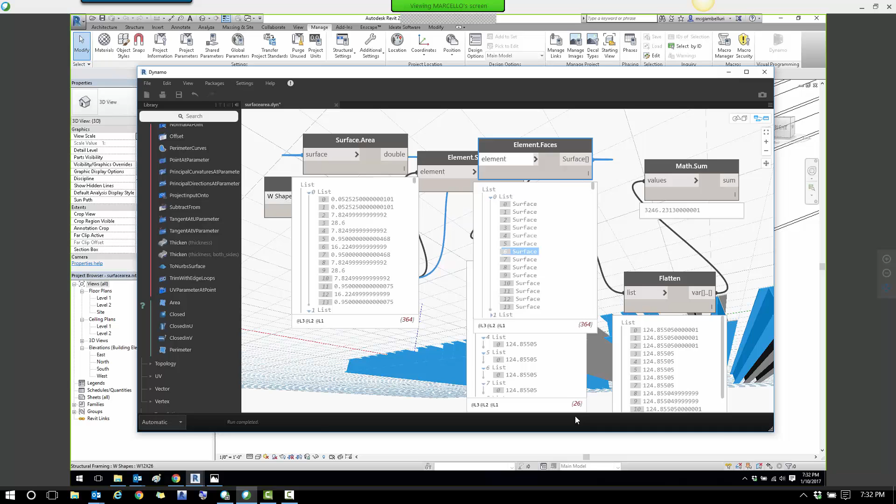Oh, one more thing. If you have these surfaces, you can actually use the thicken command to thicken the faces, and if you thicken the faces, you actually have simulated fireproofing. Then you can send that back into the model under a different category, and it would be fireproofed. Does that make sense? Yes, if you thicken these all outward, that would be a thickness around, and you can use that as fireproofing. Pretty cool, I've done that before too.

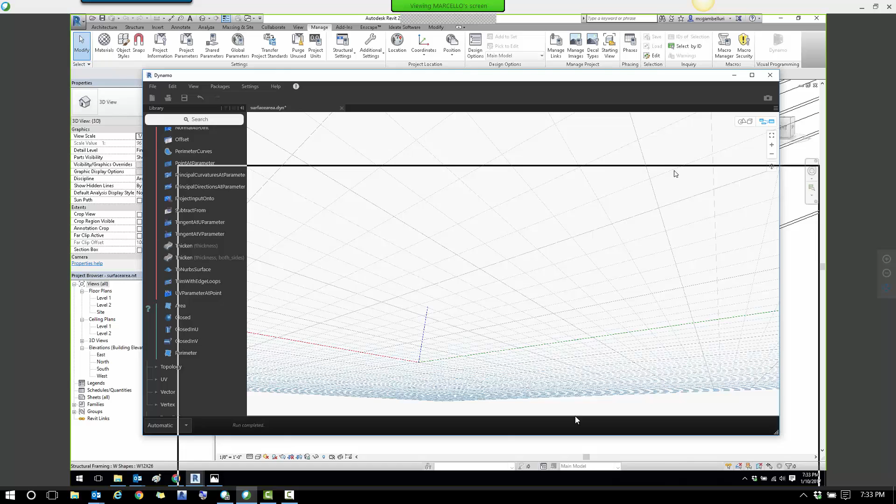Okay, one more thing before we close, I want to warn everyone about this. Let's start again. When you're dealing with beams and you're dealing with location, structural beams, if you want to drop this structural beam down, you can do it two ways: you can change the offset level, or you can change the z-offset value.

In our office it kind of depends on what we're doing, but typically, if it's floor framing, flat floor framing, we'll do the z value. If it's roof framing and the beams are different heights, then we'll do start and end offset. But do you see how that's being lowered? Because you can either do that, or you can do -6 here, and -6 here.

Here's my warning to everyone, because as you get more involved with Dynamo, you're going to be extracting beam surfaces, and a lot of times I'll put channels on top of these beams, and I'll need to know the actual location. In this scenario, if you select the beam, just a warning here, because I got burned by this pretty hard.

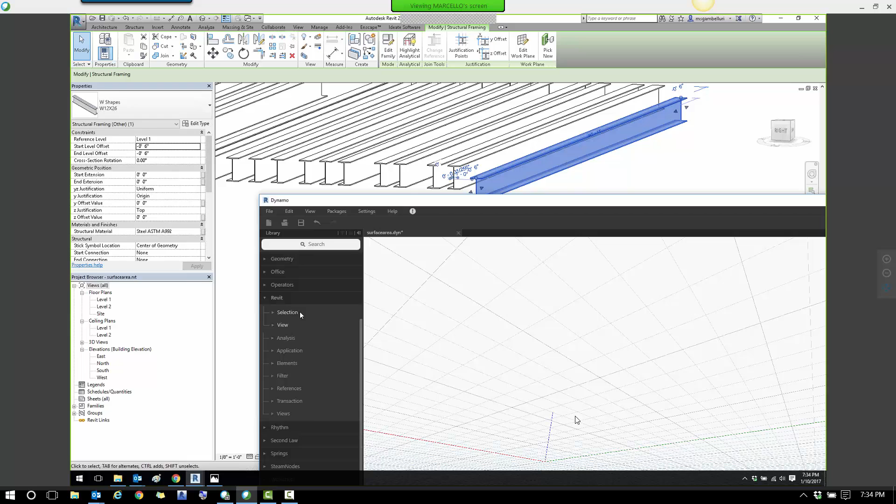So if you select the actual beam element, like this one, the way you get this location is you go to elements, then under element you say beam, structural framing, and then location. It gets curve geometry from location of specified structural element, and it actually gives a curve. What the curve is extracting is this curve right here.

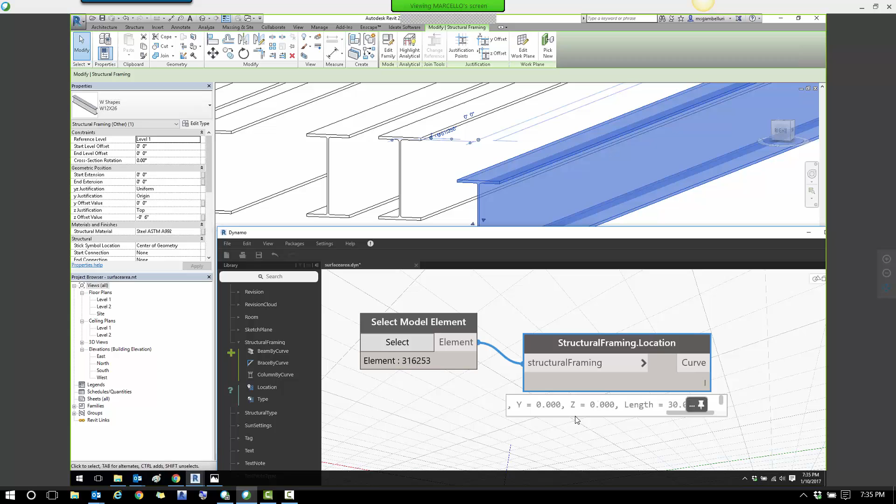But just be aware, if you actually take this beam and offset it instead of using the end offsets, and you use the Z offset value instead, do you see how its work point line, what I call the blue wire, is still up here, but the physical beam is down here. Dynamo is still reading the beam up here, so you're still going to see your Z value equal 0, even though this beam has dropped down 6 inches.

So it's something to be aware of. You could modify that by getting set parameters if you wanted to, but just be aware that when you're pulling framing location, it's pulling this blue line location, not the physical top of this beam. Got it, got it, okay, cool.

Okay, I think that's a good place to end. Hope you learned a little bit today. I have about 20 topics I could cover, but of course I just wanted to talk about the quick, short, sweet ones. Maybe we'll do a part 2 one day, Cesar? Yeah, but that will be in person, right? Yes, in person. Awesome.